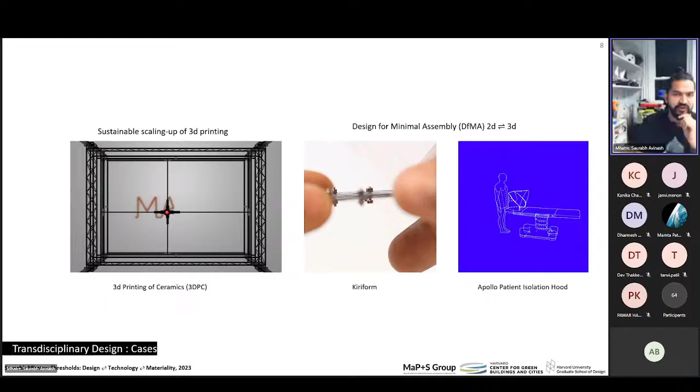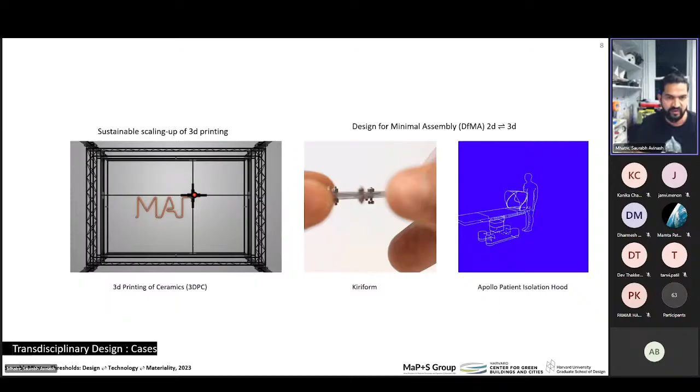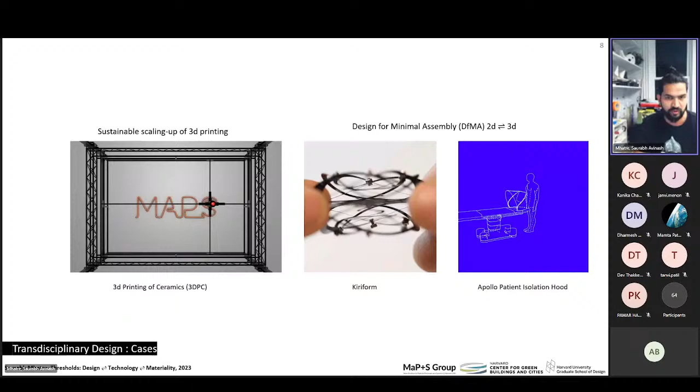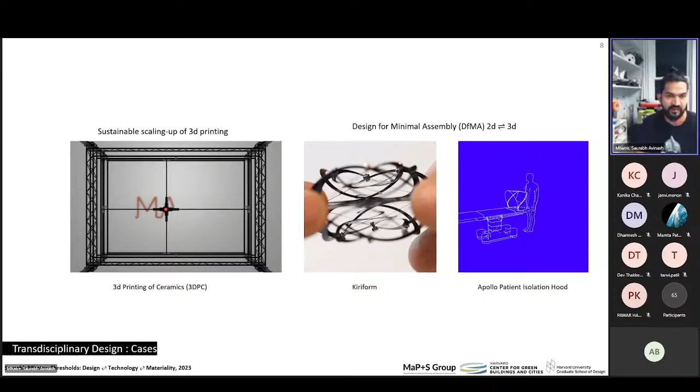I'm going to give you 3 examples of projects which fall within the blurred domains of design, science, technology, materiality, and in some way contribute to the larger agenda of sustainability. First, I'm going to talk about our work on 3D printing of ceramic, a sustainable and opportunity-driven way of scaling up 3D printing in context to architecture. And then I'm going to show you 2 projects, one which starts off as pure curiosity-based research, a project which is a solution trying to find a problem, and the other one, applied research, which is a solution for a very well-defined problem. Due to time constraints, I won't be going too much in depth, but will be open for questions after the presentation.

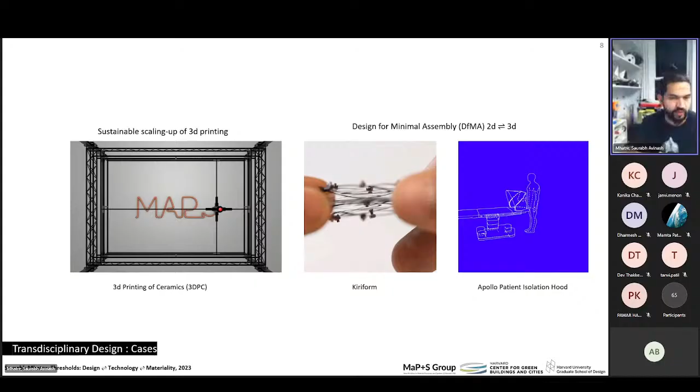I'll start with the first one. Why ceramic 3D printing? 3D printing, also known as additive manufacturing, is a manufacturing process where a 3D printer creates three-dimensional objects by depositing material layer by layer in accordance to the object's digital model. Using these 3D printers, we can make efficient, precise, dynamic, and beautiful creations with a variety of materials.

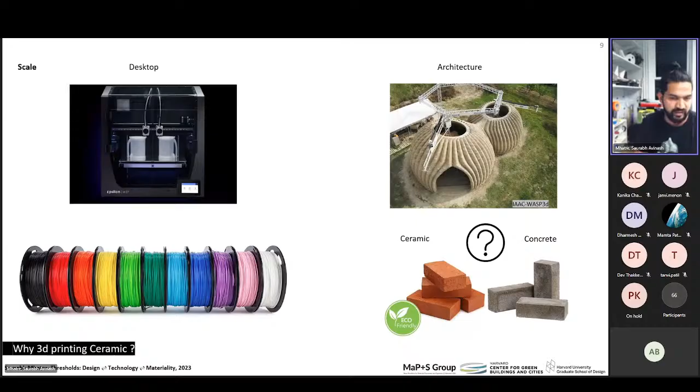Majority of the 3D printers available in the market cater to the desktop scale and use commonly available plastics as the printing material. But when we think about 3D printing of larger objects like buildings, we can't imagine printing tons and tons of plastic. It is not sustainable, and hence materials like ceramic and concrete come to mind. Majority of the large architectural scale 3D printers are 3D printing concrete.

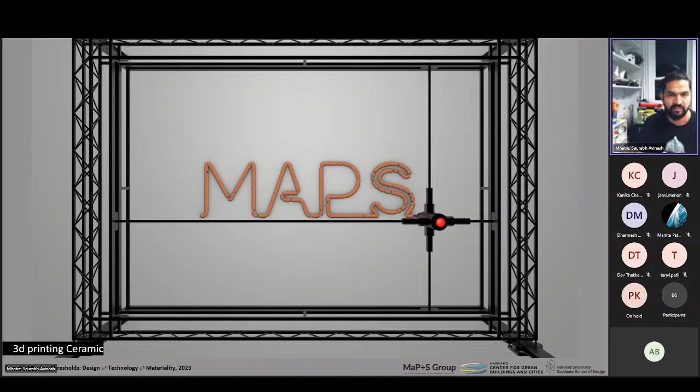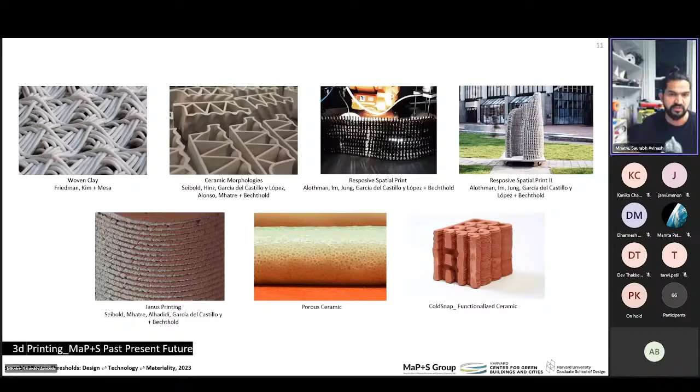But we believe that ceramic as a material holds a lot of promise as a sustainable option, and when paired with robotic workflows can drastically reduce the carbon footprint caused by the construction industry. I would categorize this into an opportunity-based research. For the last 5 years, we, the MaP+S group at Harvard GSD, have focused on studying conventional ceramic manufacturing and forming processes and researching on how integration of emerging technologies can add novelty to the industry, but also achieve larger goals like customization and sustainability.

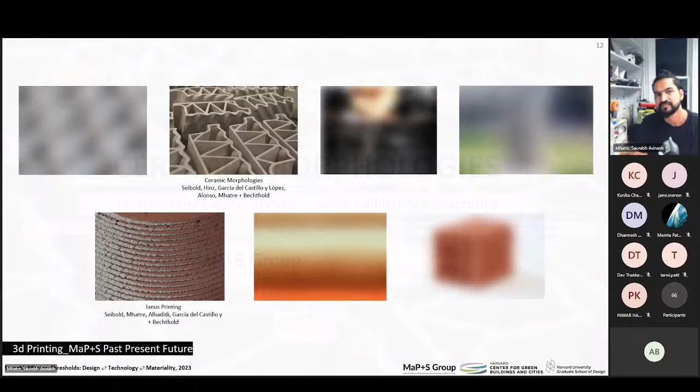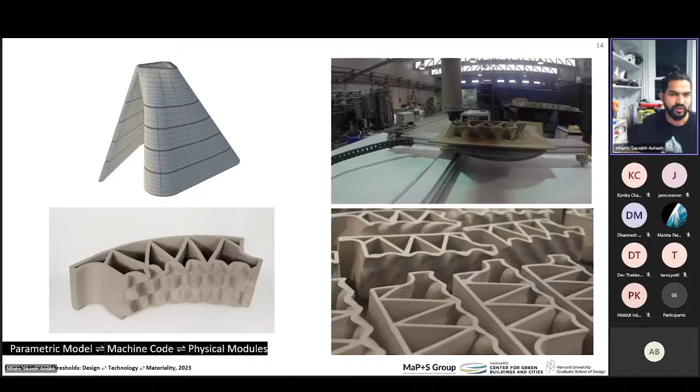I'm going to focus on 2 projects, one which looks at the 3D printing of a single body of clay, and another where we are co-extruding 2 different bodies of clay together. This project utilizes a clay extrusion system and 3-axis armature to produce each of 552 unique ceramic elements for the pavilion to be exhibited in Cevisama, one of the biggest ceramic expos in Valencia, Spain. Each element is sized according to its position within the structure, the dimensional constraints of the printing bed, and a maximum allowable tool path length.

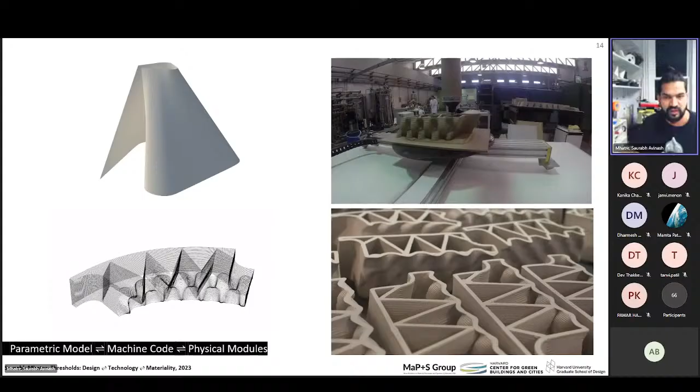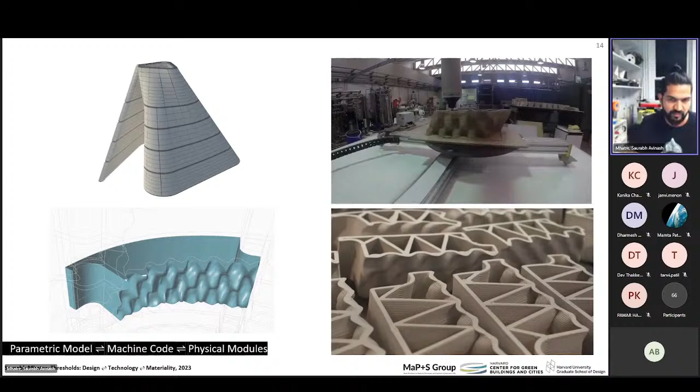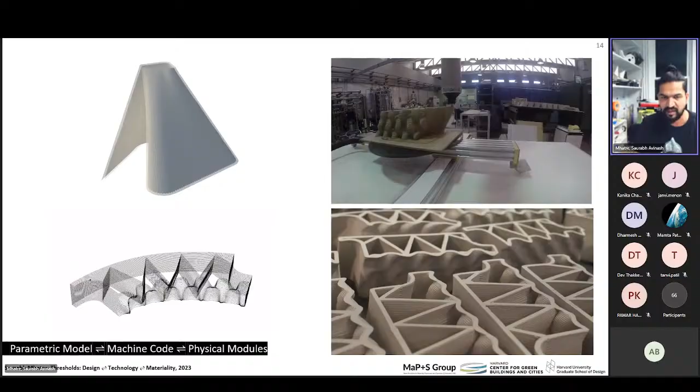We developed a novel computational approach to generate the surface geometry of the pavilion, discretize the form into individual bricks, and accommodate for the structural metal frame. Toolpath geometry and machine code is also generated directly within the parametric model. The digital workflow enabled us to account for shrinkage during the drying and firing process, reduce overall printing time and material consumption, and tune the stability of the individual bricks.

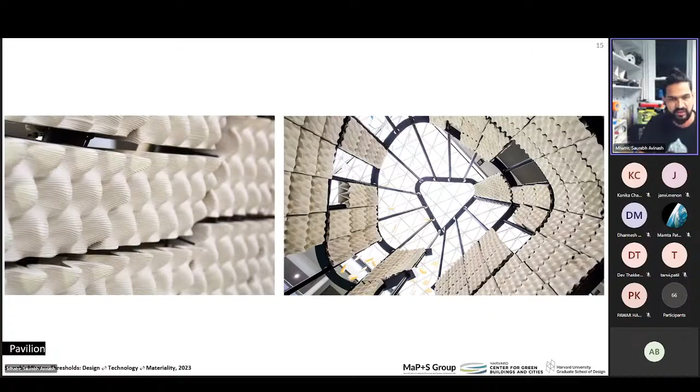Here are some shots of the pavilion. The outside surface was smooth and the inside surface was bumpy based on research on geometry and thermodynamic heat transfer of the different surfaces. This project shows that using CNC and robotic technologies with ceramic enables the vision of mass customization rather than mass production. In this project, all the material testing, workflow development, and prototyping was done in-house at the university in collaboration with the Harvard Ceramics Lab, and the knowledge was shared with the Institute of Ceramic Technology in Spain, who did the final production.

After having developed a workflow for the efficient printing of a clay body, we wanted to see what opportunities arise when we are able to print multiple clay bodies in a monolithic form. Is it possible to print different clay bodies with different mechanical performative properties in a single module? Can we imagine our walls to have a single material, ceramic, but performing differently across the cross-section, certain areas taking load, certain areas offering thermal insulation, areas being porous and super light, all within one single homogeneous form? That's what we explored in Project Janus.

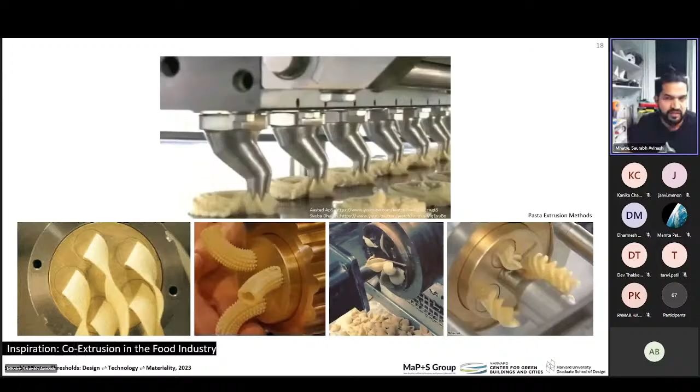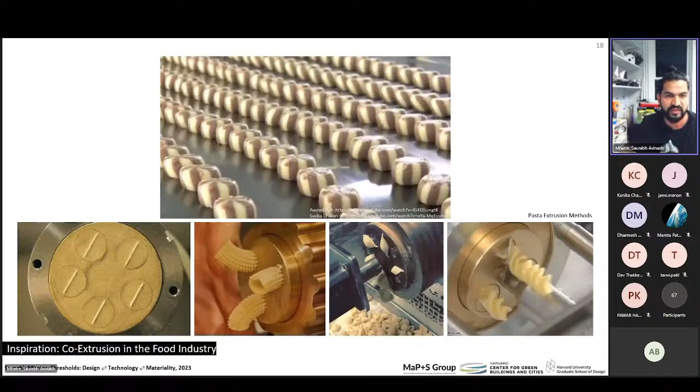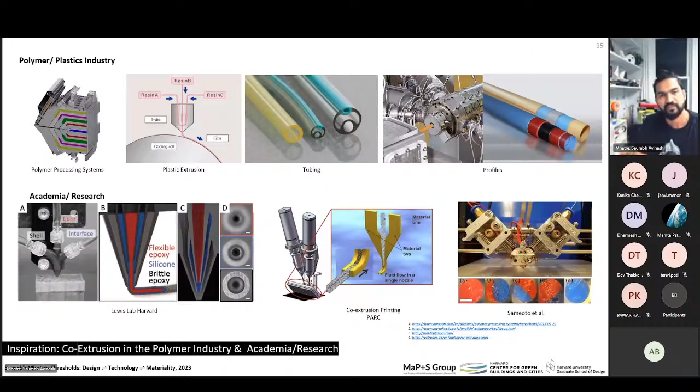Janus is defined as the god of transitions and duality in ancient Rome and hence seemed like an apt name for the project. Throughout the process, we always look at examples from different fields as a start point. In this case, you can see that the method of extrusion has been quite mastered in the food industry for the manufacturing of a lot of commonly known food items. The same is also well developed in the polymer extrusion industry and academia, especially the design of multiple hierarchies of coaxial nozzles. We thought, wouldn't it be interesting to do the same with ceramic? What design and application opportunities would it open up if we're able to achieve a multi-material 3D printed ceramic workflow?

So building on a previous work, our setup consisted of two tubes of different bodies of clay, red and white as seen, with similar shrinkage and water absorption properties, filled in tubes of a screw extruder, which is like a large syringe mounted on top of a 6-axis robotic arm. Normally, this robotic arm is used in fabrication processes like assembling cars, but for us, it's a very flexible form of tooling. The two material tubes were aligned in an angle of 45 degrees as it reduces the length of travel from the individual cylinders to the nozzle, as well as increases the travel length after the point of intersection to counter the material stresses.

Ceramic as a material goes through shrinkage in multiple phases, from its first stage of printing to its final stage of firing. That's why it's very important to select the two bodies with similar shrinkage rate and water absorption.

The design of the nozzle played a very important role in our process. After a few iterations, we narrowed down to two designs. First, the Janus nozzle, which could print the two materials side by side, and the center core nozzle, which will print one material inside another.

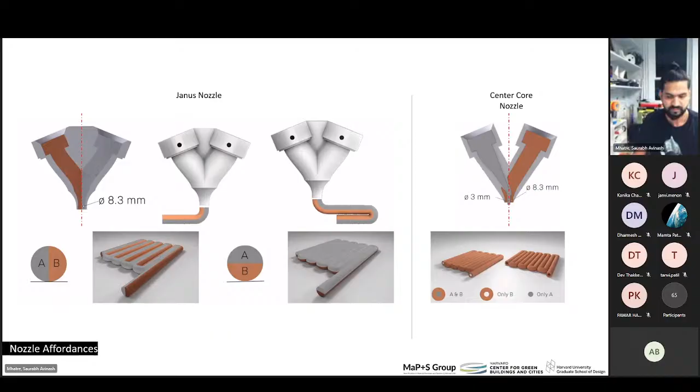Both had a lot of potential in design, as they could offer different affordances for the product, but for this project, we decided to focus on the Janus nozzle because there was more design space to be explored with it, given the degrees of freedom of the robot it would be mounted on. In simpler terms, when you look at the Z axis, if you rotate the Janus nozzle around the axis, it gives you more unique possibilities than the other. This is how the extrudate, the material that comes out of the nozzle, will look like for both these cases.

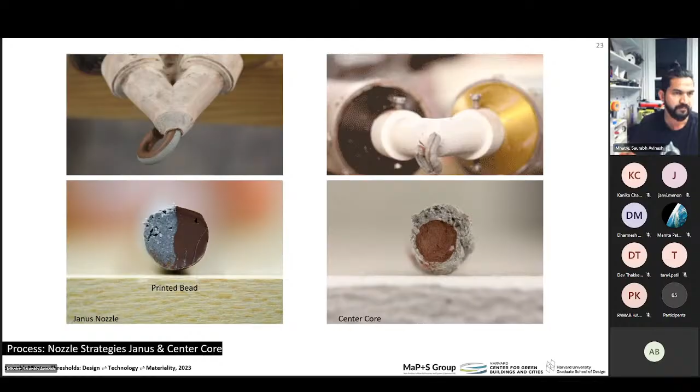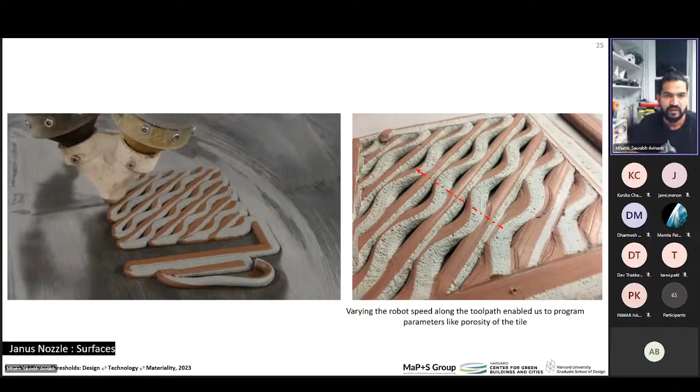Using the Janus nozzle, multiple tests were performed to explore the design space, to establish relationships between various parameters of extrusion like robot speed, layer height, bead width, extrusion rate. We tested different dimensions from lines to surfaces to solids. Once we got a hang of the parameters, we started testing them on flat toolpath objects. Using these objects, we also started testing the different relationships between the parameters.

For example, keeping all the parameters constant, increase in the robot speed reduces the width of the printed bead, and hence decreasing the robot speed increases the width of the bead. So in the right image, you can see that by adding slight increments to the robot speed, we got a decrease in the bead size. And because of the geometry, there was an increase in the level of porosity of the tile.

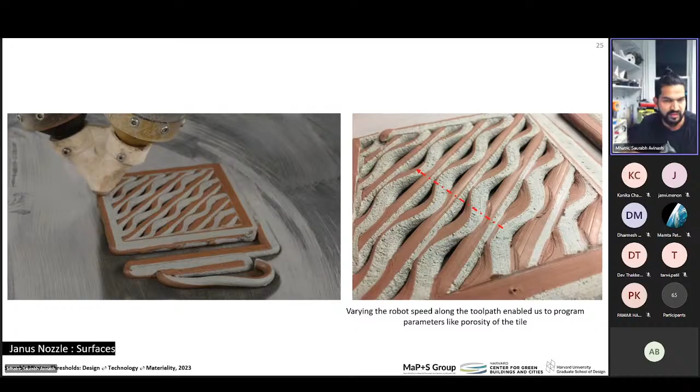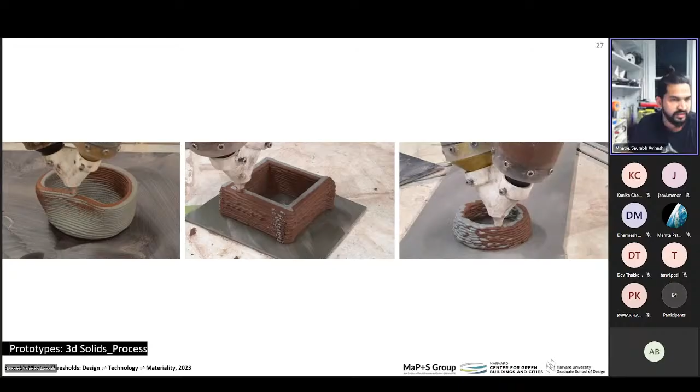We also experimented with three-dimensional objects where the toolpath was static and the nozzle orientation was dynamic, as well as 3D forms. Our computational workflow used a plugin called Machina, developed by one of our team members, Jose Luis, to go from digital geometry to the robot code to the printed object.

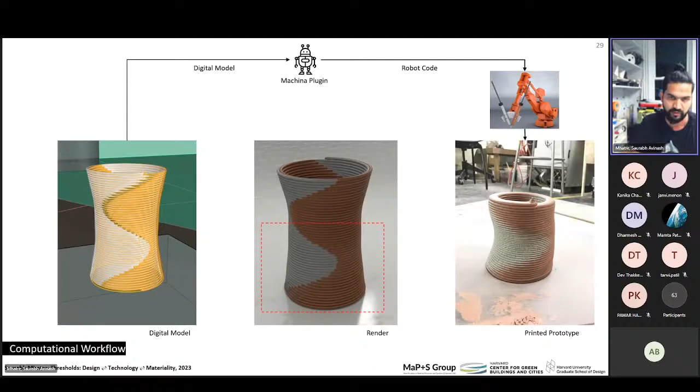Based on the rotation of the fourth axis, we were able to accurately determine the deposition of a particular material where we wanted it. This helped us to know exactly the effect the angle of the extruder of the robot would have on the printed path, as well as how the path would look from top as well as side elevation.

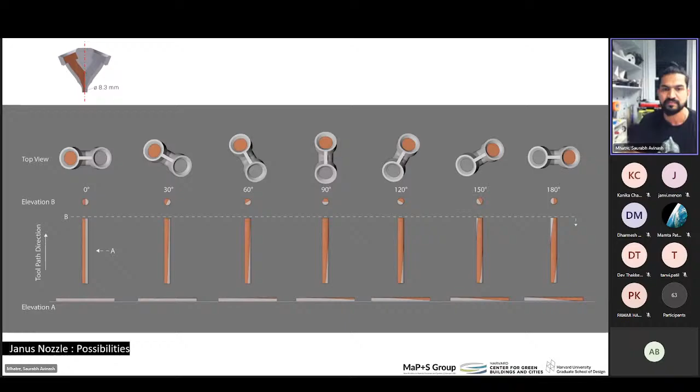Knowing this, we decided to create a proof of concept of our research: to be able to take as input a black and white image, and the script would divide the image into horizontal tool paths. The rotation of the nozzle 180 degrees at the fringe of the black and white pixels was the main agenda.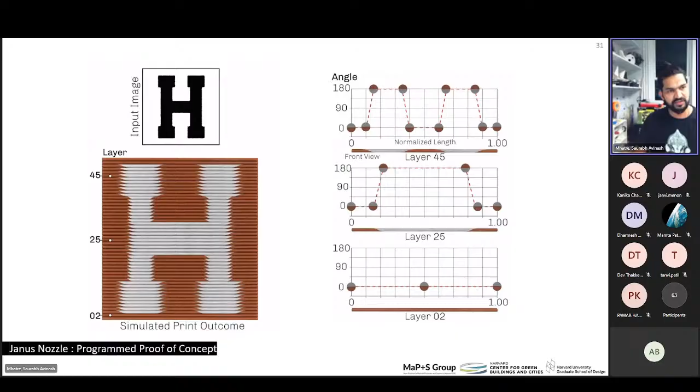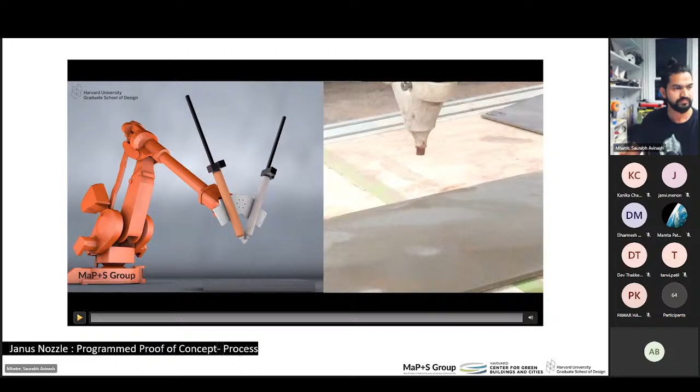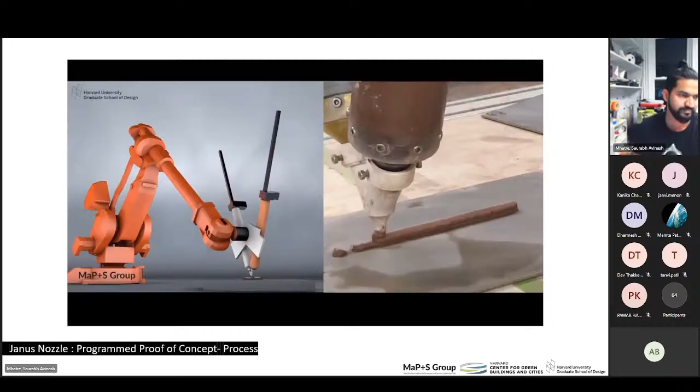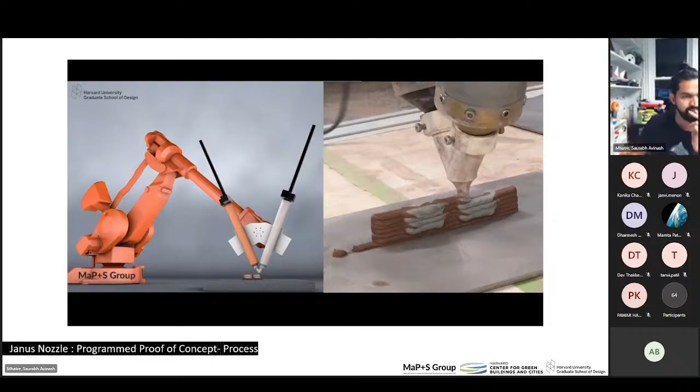So as you can see in layer number 45, at the intersection where the white pixels change to the black pixels, there would be a change in the fourth axis to 180 degrees, and hence it would cause a change in the body of clay that's visible in the front elevation. Here's a video of the process. I guess you get the idea.

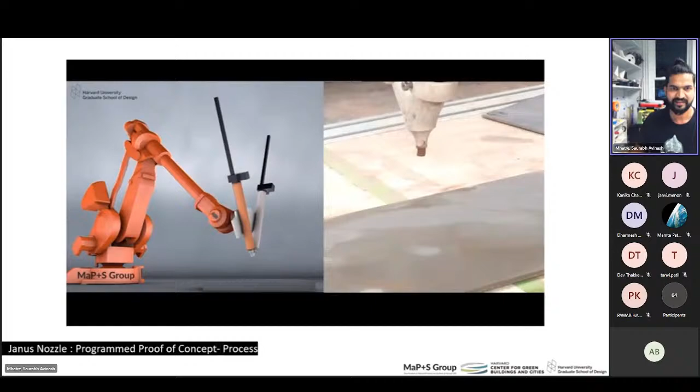Hence, instead of using a lot of different kinds of materials in a typical wall section of our houses, which perform different functions, we can envision a single material, ceramic, with variable properties to do the same. The next project I'm going to talk about is Kiriform. This project falls in the curiosity-based, opportunity-based research domain and is a solution looking for an application.

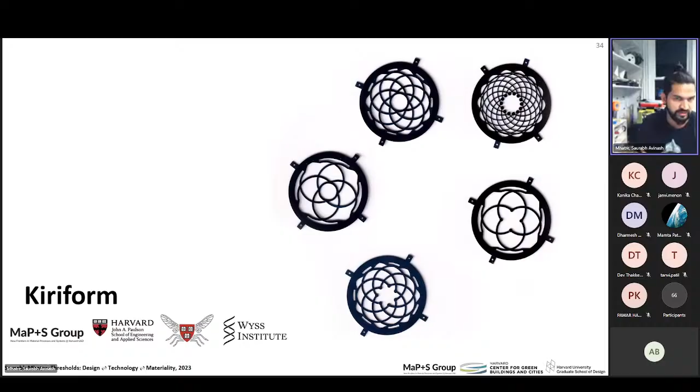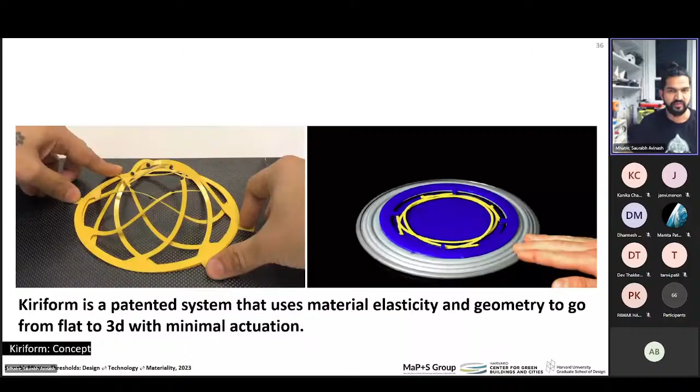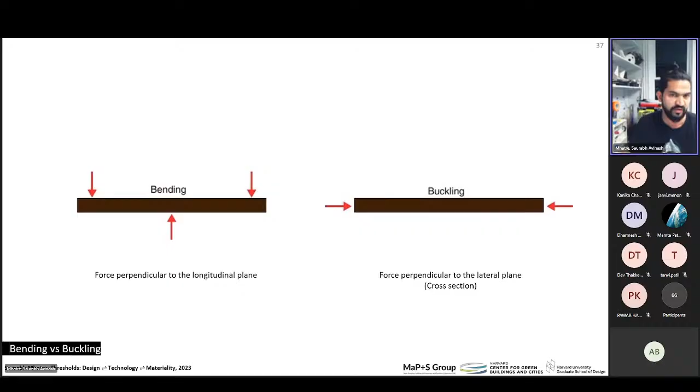This mechanism leverages buckling, which is conventionally something you avoid in structures and construction, for its deployment. It is different from bending by the direction of the force applied. Kiriform is manufactured out of flat sheets of elastic material with simple fabrication techniques. It is fast to assemble and requires minimal hardware, making it cheap to manufacture.

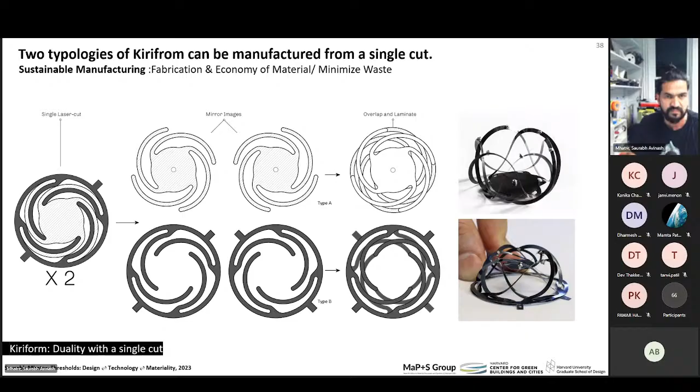It can be divided into two types based on the method of actuation: one from the perimeter, the outside, and the other from the inside, in the center.

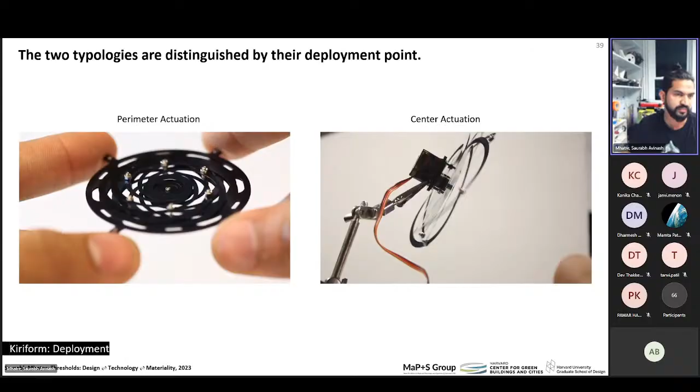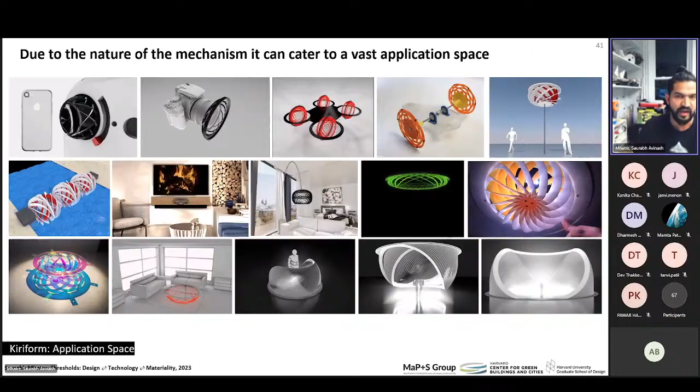Our developed parametric model makes the system applicable to a wide range of scales, from small medical devices to larger furniture and structures. The system is suitable anywhere fast and compact deployment is needed, as in the following examples. We have successfully developed Kiriform at the millimeter scale in collaboration with the Harvard Microrobotics Lab.

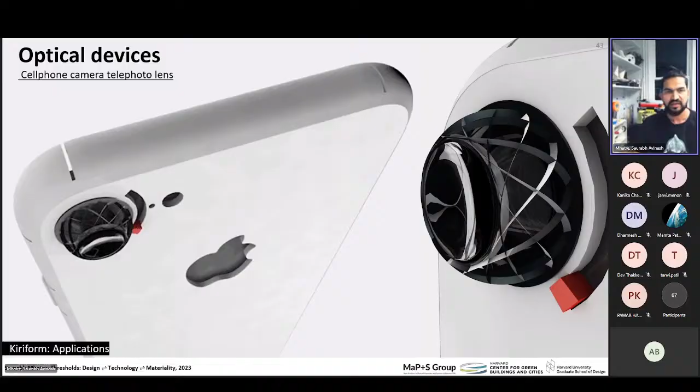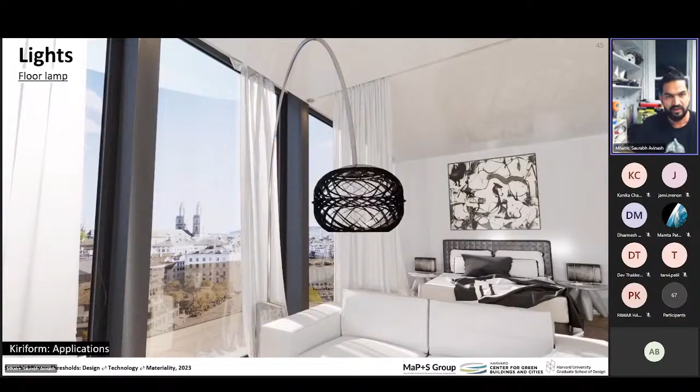Kiriform can be integrated in optical devices with moving parts, such as lenses and diaphragms. Its aesthetic qualities are also suitable for the design of household products, such as lampshades and lighting fixtures, where the intricacy of the geometry creates interesting patterns, both as a static object or even better, as a dynamic one. The compliant transformation of the system can be used to modulate the intensity of light.

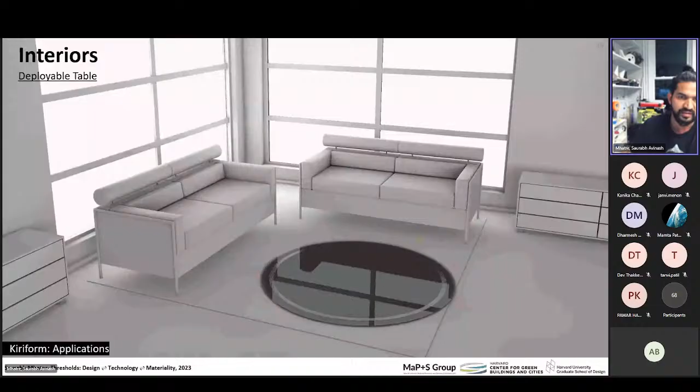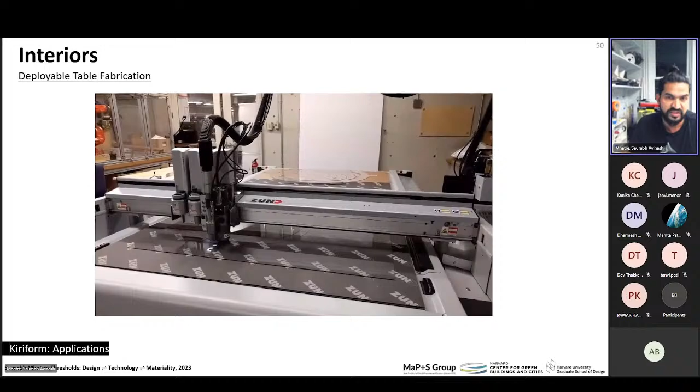Kiriform is suitable for furniture designs that can be shipped flat and deployed very fast by anyone with little effort and no tools. The method of fabrication is dependent on the scale, which in turn determines the thickness of the material used. It's compact to store and transport, easy to deploy.

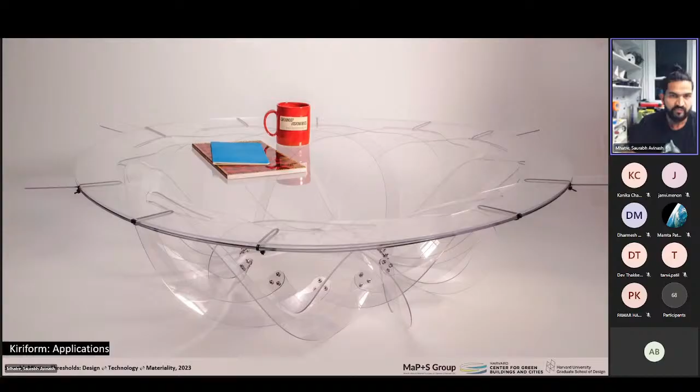Geometry facilitates the creation of functional and affordable products, while at the same time providing minimal and elegant design aesthetics. As you can see from the above examples, different scales of this mechanism can be manufactured from different materials and different processes. Some fabrication processes make sense at certain scales.

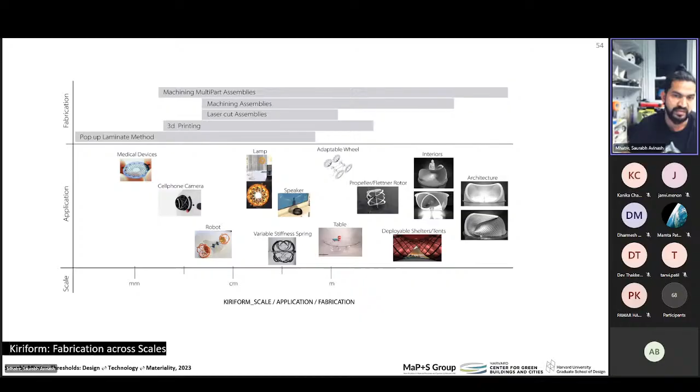As a side note, we also have a very good agreement between our experiments and simulations, which I decided to keep on the backstage of the presentation.

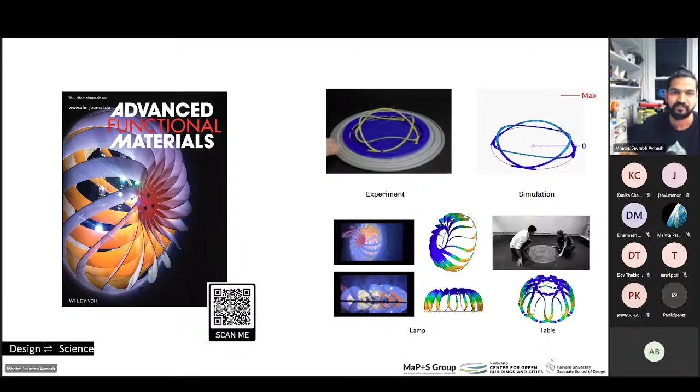Those interested can check out the paper we have published in Advanced Functional Materials along with the Harvard School of Engineering. There's a research group there called Bertoldi group, which also helped us quite a bit to develop all the mechanics side of this. In conclusion, Kiriform is a technology with high parametric flexibility to cater to applications at various scales where rapid deployment is essential.

Again, this work would not have been possible if it weren't for all of these various people from different groups at Harvard.

Okay, now moving on to the third project. So, as we all know, the pandemic has been the most dramatic disruption to human activity in a generation.

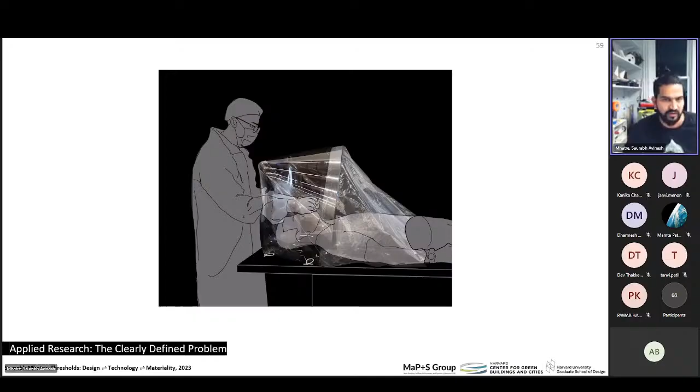For many designers, it has been a time to refocus and rethink how we design products and how, as designers, we can use our skills for the greater good. For our project, Apollo Isolation Hood, our problem was very well defined: creating a barrier to separate the doctor and the suspected COVID positive patient to reduce the aerosol spread of COVID.

The Apollo Patient Isolation Hood is a localized negative pressure ventilation system for hospital beds to help contain the droplet spread of COVID, including during aerosol generating medical procedures such as intubation and extubation. The patient isolation hood encloses a patient's upper torso and head in a negative pressure environment. It provides a barrier protection between the doctor and patient and controls the aerosol via negative pressure environment.

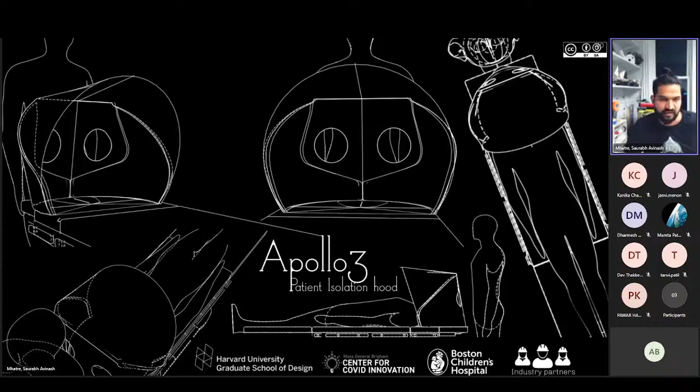This is a collaboration between the Harvard School of Design, Mass General COVID Innovation Center, Boston Children's Hospital, and other industrial partners. In our meetings, the doctors from MGH and Boston Children's Hospital provided us with 36 guidelines to design the hood and their weighing as per priority.

Some of the guidelines range from optical clarity, the surface smoothness, that it should be very lightweight, very flexible, it can adapt to different bed sizes, etc.

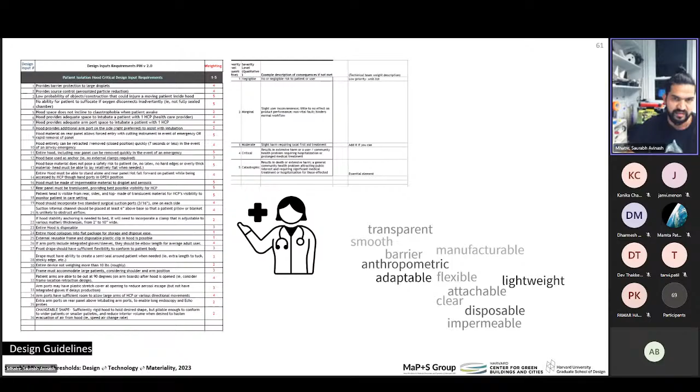As a group, we looked into multiple options of enclosures which would be deployable and easy to manufacture. Because of the severity of the pandemic, we were on a very strict timeline and wanted to look at forms which were easy to fabricate and very easy to assemble with minimal effort.

That's why we started to look at techniques of origami, kirigami, and active bending, the technique of creating volumes from flat sheets.

As we were in lockdown and had lost access to the physical fabrication lab, we started by simple paper and knives to make small prototypes of our designs, while also speculating the material and processes needed for manufacture of full-scale ones.

Can you hear me fine?

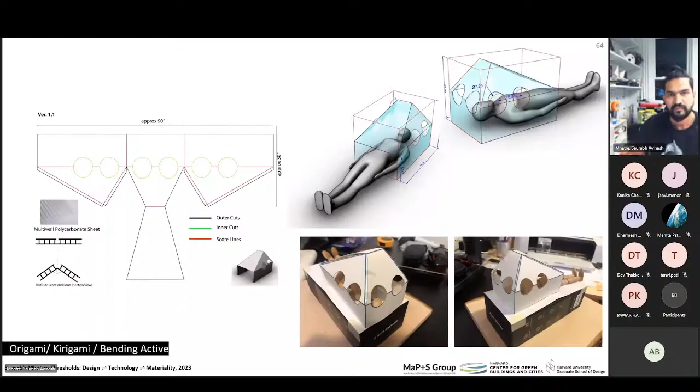Simple origami techniques were a good start and could easily be scaled up using thin sheets of PETG plastic. One drawback with origami was that it was accompanied by edges and creases. To omit the edges and get optical clarity, we started bending instead of folding, so every well-defined edge became a smooth bent surface.

The plastic needed to be thin enough to fold and bend, but stiff enough to keep shape and not wobble. The bending and locking also added a lot of structural stability to the forms.

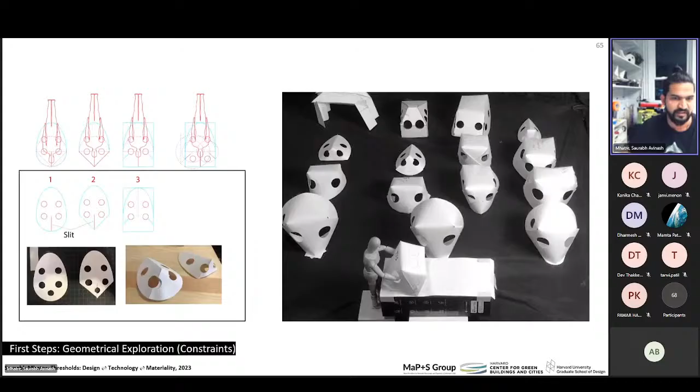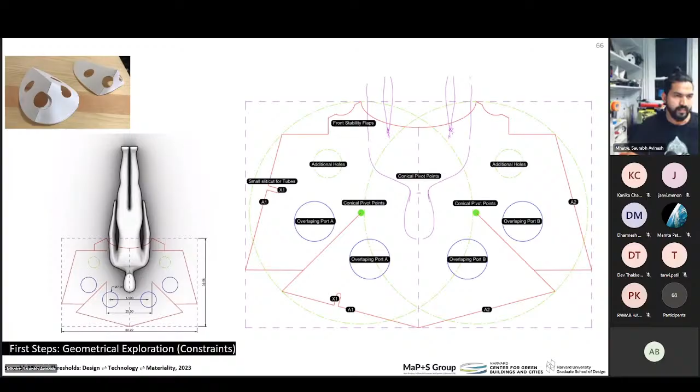Here is one of the first versions of the hood we designed. I'll use this to explain how it folds. As you can see, there's an overlap of the two flaps which give it a sort of double thick surface.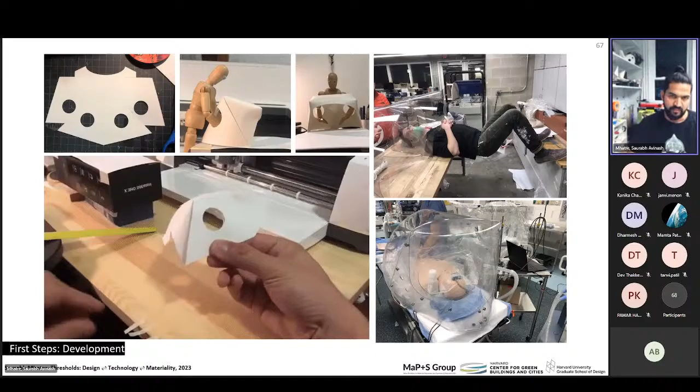You can see an assembly of a miniature scale version of the hood. Seeing the potential of this design, we decided to make a full scale version of the same with PETG plastic.

The best aspect of these forms was that they were made up of a single flat sheet and needed minimal joinery. We had the doctors from the hospitals test this in the hospital, and we also did a lot of tests of this form in a lab.

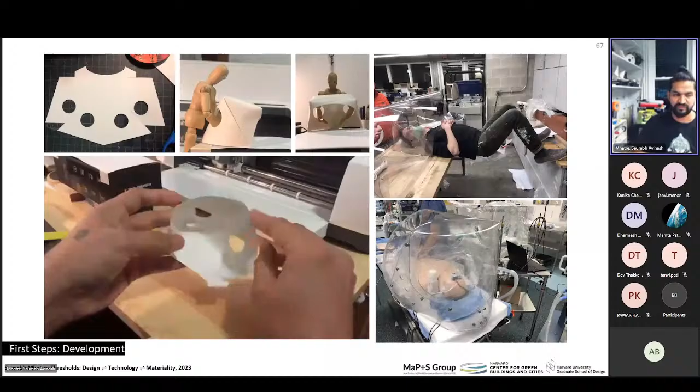Over the next few days, we prototyped through a lot of different iterations, taking into account the guidelines, stability tests, and the feedback from the doctors.

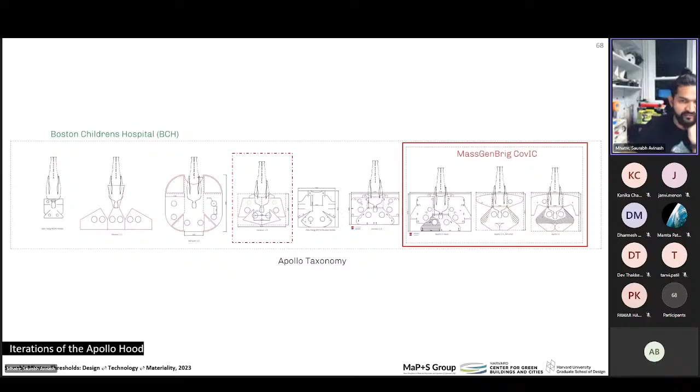Some of these stood out as viable options which satisfied most of the critical guidelines highlighted at the start. They did have some demerits though. Looking at the pros of the most promising options, we designed the final hood which had the best parts of the above options and none of the demerits.

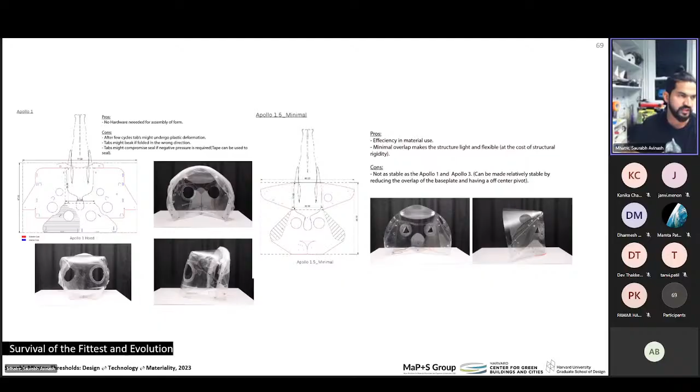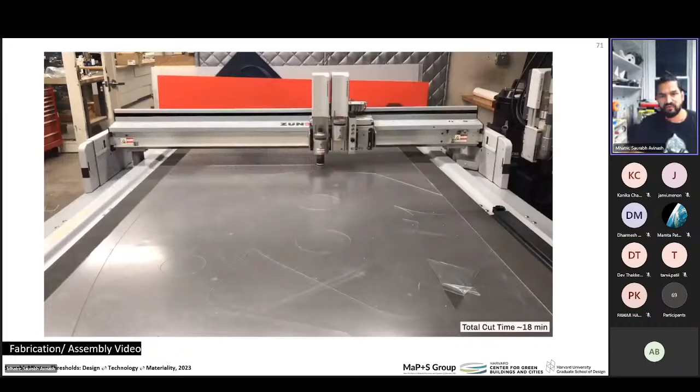So we came to the final design, what we call the Apollo 3. This shows a quick video of the fabrication and assembly. It can be cut out of a thin PETG sheet in less than 20 minutes and assembled under 1 minute with minimal joinery.

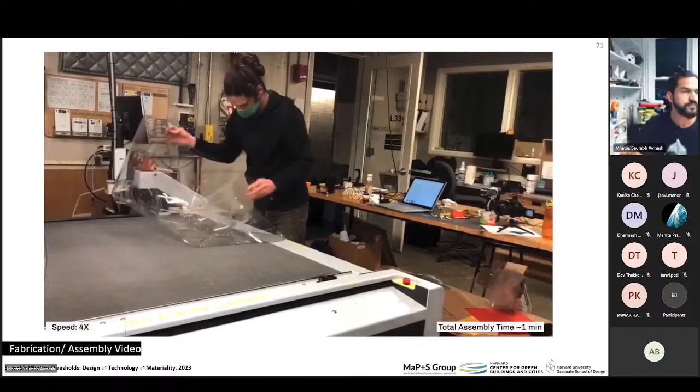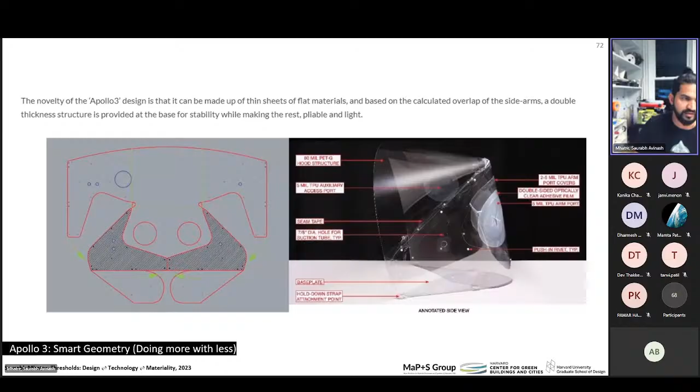We were able to use a thinner material in the Apollo 3, and by overlapping the geometry, we give a double thickness layered wall where the most strength was needed, which was at the base. Here are some detailed shots of the hood.

The Apollo 3 was made up of a flat sheet, easy to manufacture, had minimal joinery and assembly, was lightweight, was compliant to cater to various body types, optically clear and stackable.

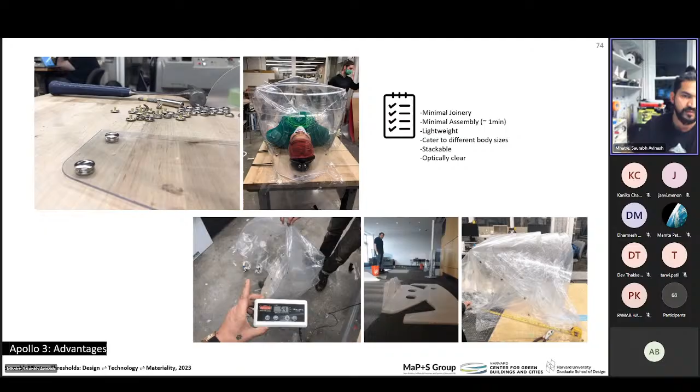We made 3 final prototypes in-house for the start and 20 more later after approvals, and sent them to Mass General Hospital, MGH. And 50 more were manufactured after by a teammate who formed a company for the same.

Due to material scarcity and supply chain issues, we had to be very mindful of the plastics we used. PETG was in short supply and most of it was being used to make face shields. Minor changes were done directly on the full-scale models, and major changes were first tried and tested on the smaller models before translation to full scale.

This was a collaborative, non-hierarchical effort of more than 200 people, made possible using online communication via Slack. Designers, engineers, doctors and industry partners took active part in this whole process. All files have been made open source via GitHub to help disseminate this knowledge to anyone out there.

It started under strict fabrication constraints during the COVID lockdown, was translated into a full-scale prototype with constant feedback from doctors and other designers, was tested at Mass General Hospital, and is now currently on display at the Cooper Hewitt Smithsonian Design Museum in New York as part of the Design and Healing: Creative Responses to Epidemics exhibit until February. This is the last month of the exhibit.